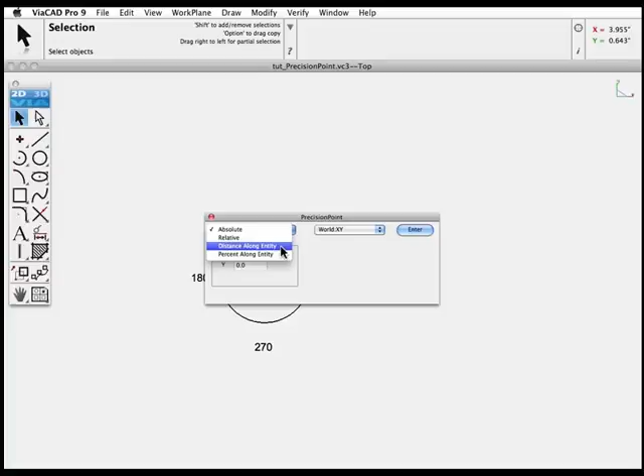The first drop-down provides methods for entering your coordinates: absolute, relative, absolute being always in relationship to the drawing origin, 0, 0. Relative coordinates are relative to your last point picked. Coordinate systems supported: the world coordinate system, working on a 2D work plane, polar coordinates, and relative polar.

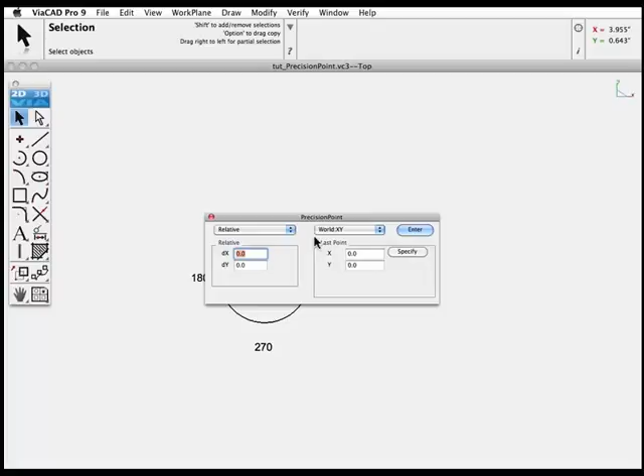To experiment, we'll go up to our line tools, choose the multi-line tool, and we'll pick our first point, access the coordinate input dialog. Remember, there's two different drop-downs. The first is the method for input, so absolute or relative coordinate input, and then you have an option to choose which coordinate system you'd like to work with. We'll start with absolute.

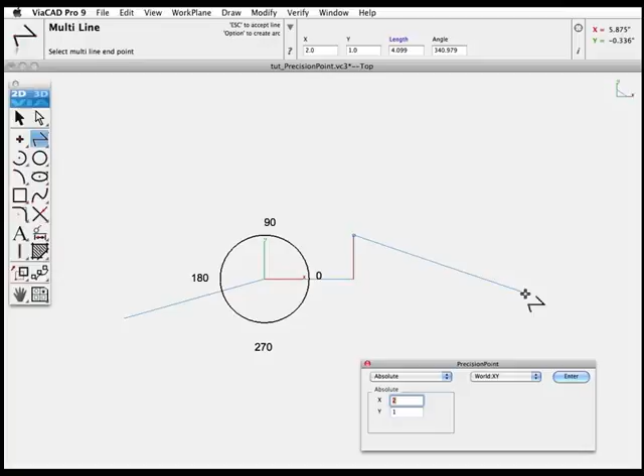Starting at the origin of the drawing, for X, we'll plug in 2, so it draws 2 inches over from the origin. If I want to go up from that point, remember this is all absolute coordinates, so it will still be X equals 2, and in this case Y equals 1. To move over to the right, this is a change in X, so Y remains 1. It's still 1 up from the origin, and 3 for X. So as you work your way around with absolute coordinates, these are the coordinates defined in relationship with the actual drawing origin, 0, 0.

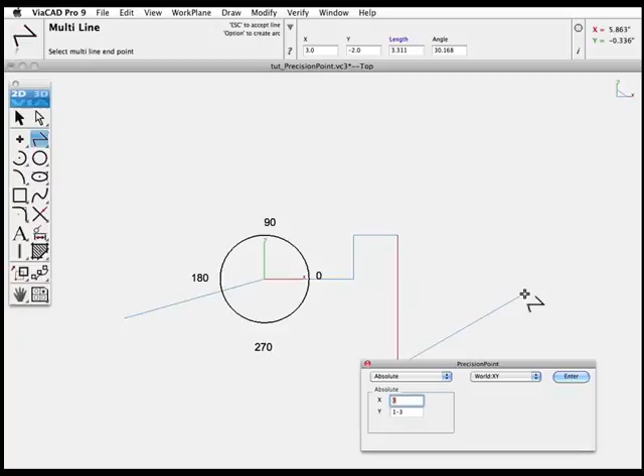Also notice you can plug in formulas. In this case, we've just put in 1 minus 3. We were 1 up, and we wanted to go down to minus 2. And at any point, you can also move your cursor and click to set a point.

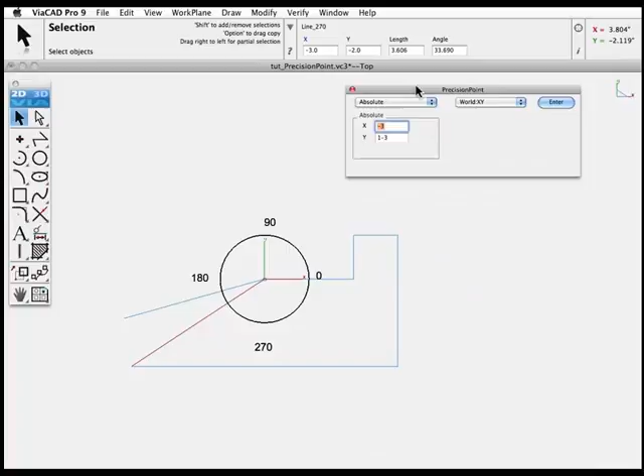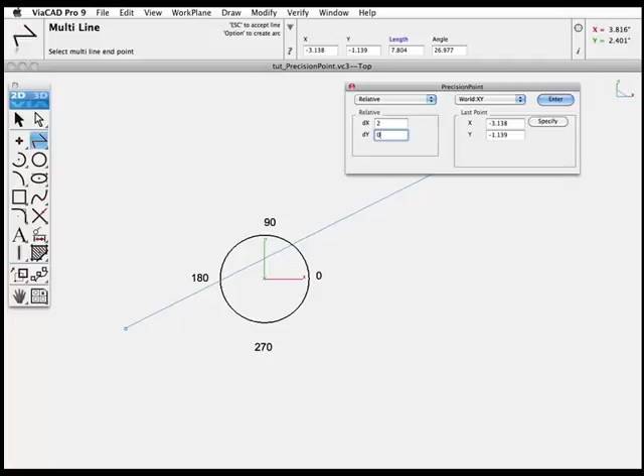Next, let's explore relative coordinate input. We'll choose relative. Notice the last point is indicated. So relative coordinate input is the change in the XY coordinate value. You can also tab through to change the dx, dy, dz values. So in this case, you're entering your first point, and then the next coordinate will be the change in the x and or y coordinate.

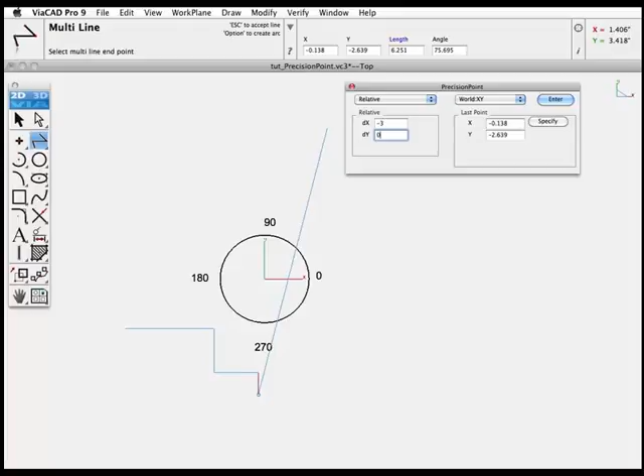So 2 inches to the right, regardless of where you are on the drawing page in relationship with 0, 0, 2 inches to the right will just be positive 2 for x and 0 for y. This is a great tool for doing floor plans, or if you are duplicating, for instance, a drawing that's dimensioned. Remember, the relative coordinates are relative to your last point. So simply enter in where you want to draw to from where you're at right now. It's as easy as that.

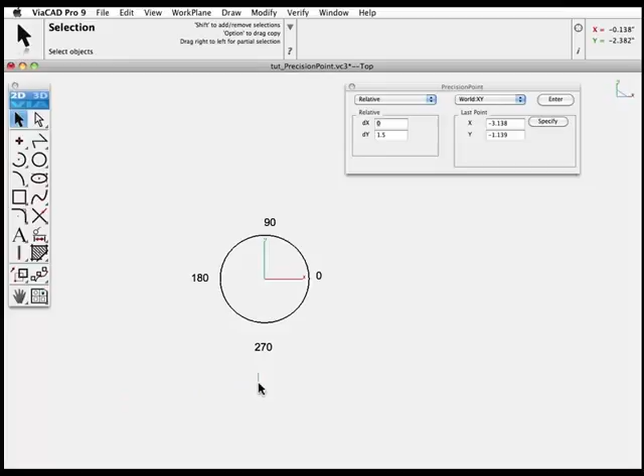This is a great tool for drawing floor plans, by the way. Again, for any other drafting task where you're trying to duplicate measurements that you may already have. Even if you've gone out and taken field measurements and written them down with sketches and notes on a napkin, and you need to be able to translate that into a scale drawing. Great tool for that also.

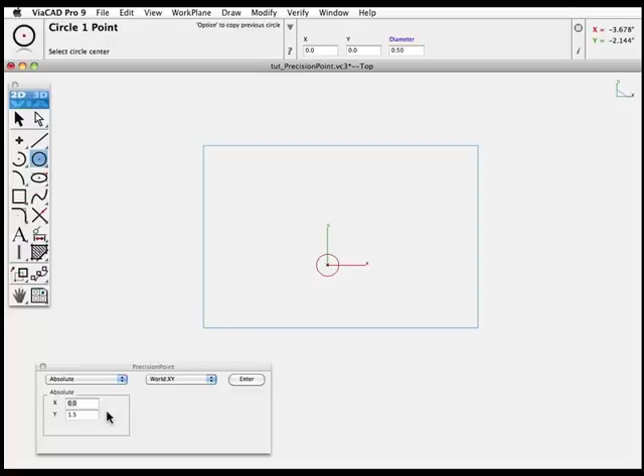This precision coordinate entry makes it easy to place circles, holes. In this case, we'll use absolute coordinates, and we'll place a couple of circles, first at the origin. And remember, in absolute mode, the center of this circle, in this case, will be placed at whatever absolute coordinates that we enter. This is great for milling and other kinds of sheet metal and mechanical applications. We'll delete that, and now let's talk about relative again.

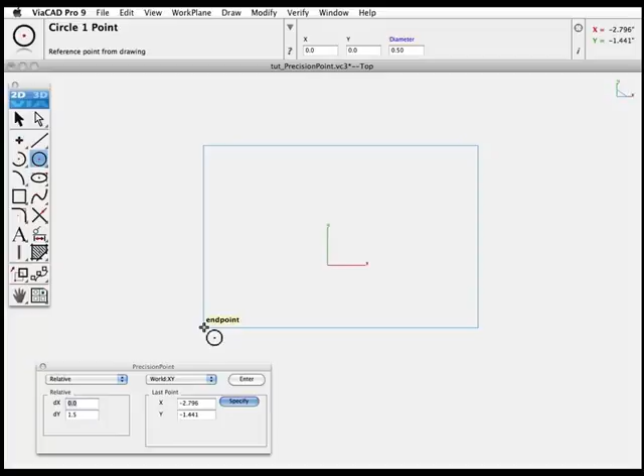Switch to relative mode. Specify. We'll set our from point or last point at the corner. Now we're going to place holes from or in relationship with that corner we just specified. So 1 inch over, another inch over. Now we're going to go 2 up. 1, 0, so just 1 inch over and again. And now 2 inches straight down. Very easy to position things based on the thing previously set.

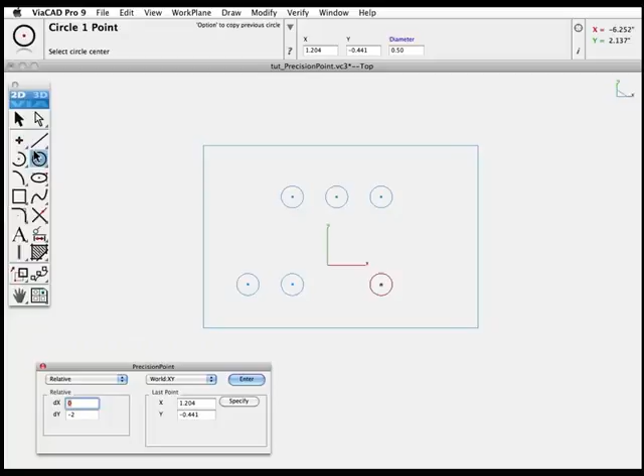Now we'll delete those. Talk about a couple of other options. Select our circle tool again. Now we'll go to the distance along entity option. We'll set this for 2 inches. And as I move my cursor over the segment, you'll see a snap point is created 2 inches from the closest corner.

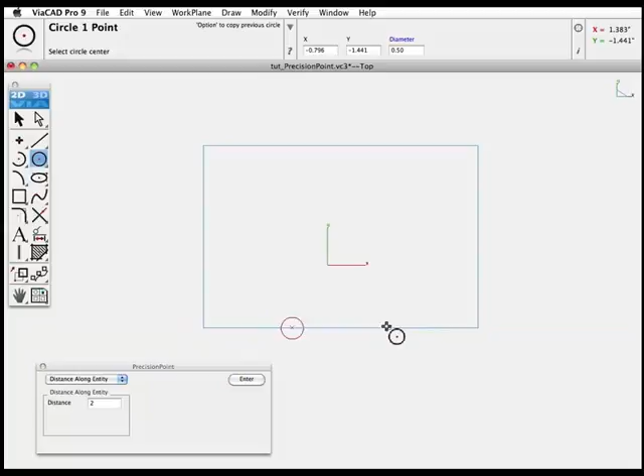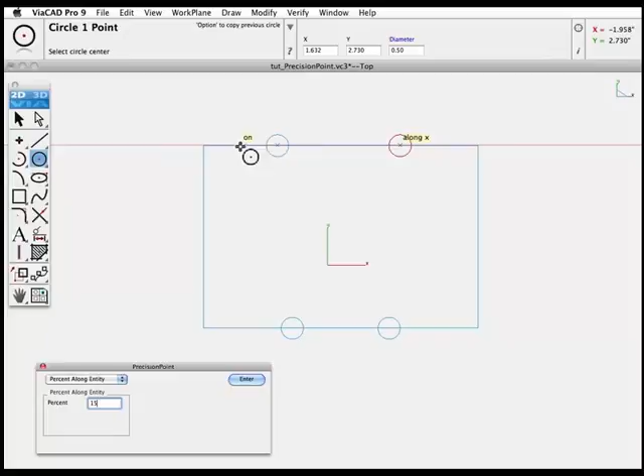There's also an option, percent along entity. Set this for 30. And you'll see that a snap point is created 30% of the total length out from the closest endpoint. Same thing for 15%. So it's the percentage out from the closest endpoint, but the percentage of the length of the entire segment your cursor is over.

Of course, these tools are not just for drawing, they're for editing as well. So we've selected our group of geometry here. We'll choose the Translate tool, pick our from point, and using the relative input mode, we'll specify the corner, and we'll move that geometry to a point that's 1.125 inches from that corner. So this allows us to precisely move geometry around in the drawing as well.

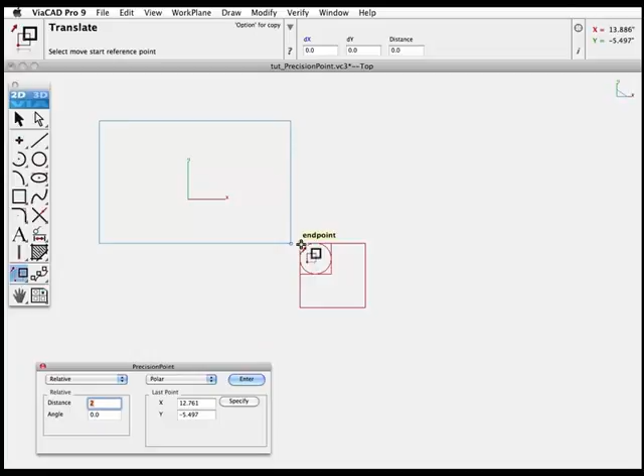So we can draw it, and we can move or copy the geometry around also. Here we'll use relative polar. We'll take this group of geometry again, move it from here, and from this point we've specified, we'll go 2 inches at a 30-degree angle, and it moves that corner right up to where we've specified.

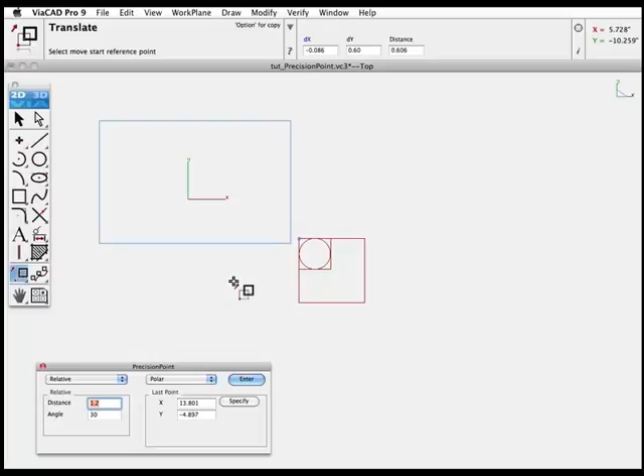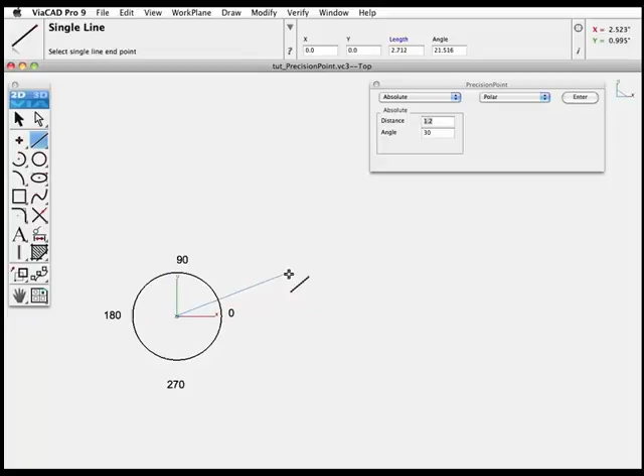Support has also been added to use standard polar coordinates for both drawing and editing using normal polar orientation as shown on the screen. We'll start at the origin. Shows 30-degree angles relative to the actual drawing origin. So we'll set another point at 0, 0 and enter in a new distance of 1.5 and a new angle. We'll enter 210 degrees. Again, these are all based on the actual drawing origin 0, 0.

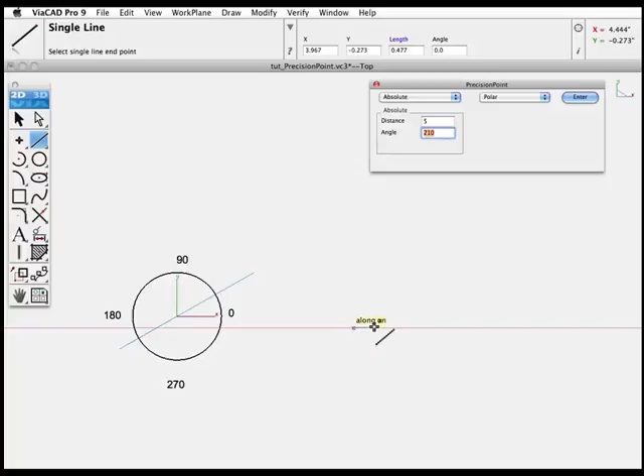Now we can move our start point off of 0, 0, start our line, and then draw a line that's, say, 5 inches long and at a 30-degree angle. Remember, the angle is an absolute angle. It's the angle of the drawing origin to the point in absolute polar mode. So it's 30 degrees from the origin to that point we just drew to.

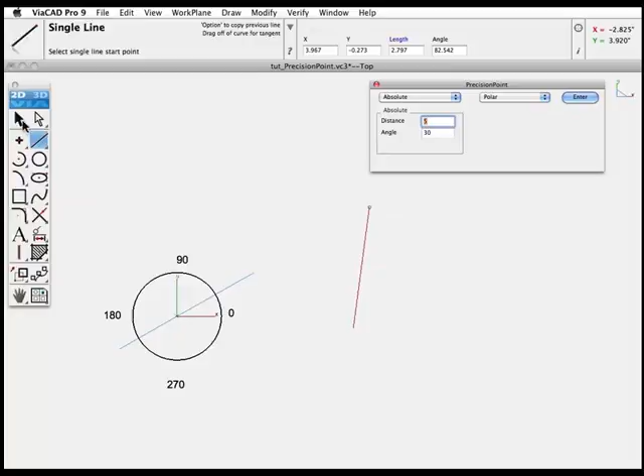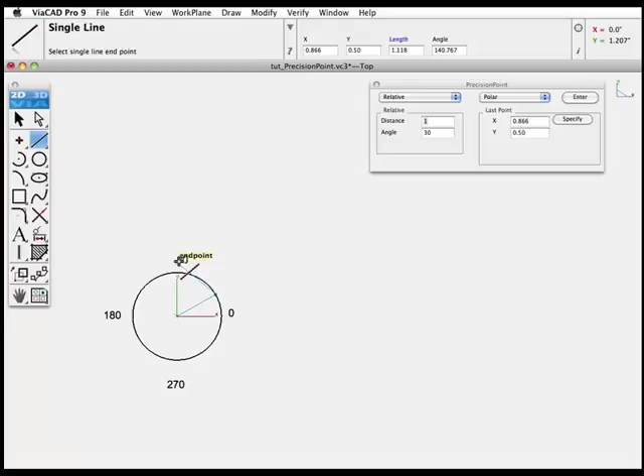Now let's delete these. In other cases, you know the length of the line, you know the angle of that individual line, but you don't necessarily care what angle that point is from the origin. So we'll set our first line, 1 inch at a 30-degree angle. Now we'll set another line. Just assume that that polar diagram is oriented around the point that we're at right now. When I say 1 inch at 90 degrees, it's straight up from the first point.

So in this case, it's distance angle, and it's always the normal polar angle, but it's around the point that we're actually drawing from. An easy way to draw with distance and angle.

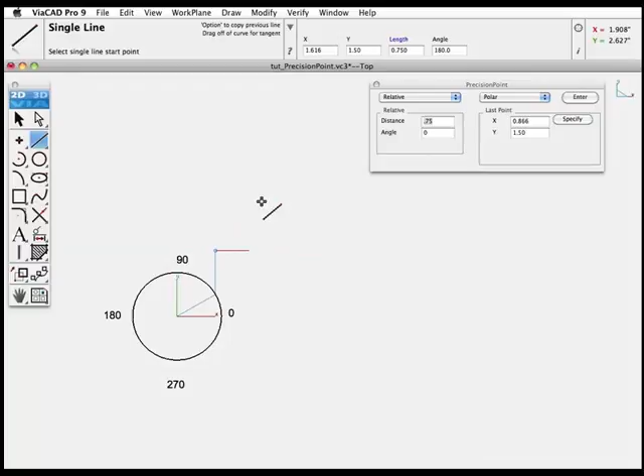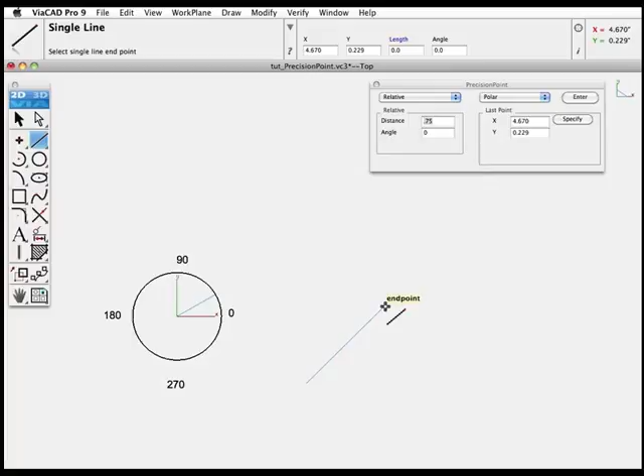Now, there are those cases as well where you'll want to draw lines at odd angles and then draw lines relative to the angle of the previous line. So for instance, you have this line, and I want to draw a line relative to it. So we'll choose specify point 1 and point 2 and pick the two ends of those lines. And now we'll say the distance of the line we want to draw is 1 inch, and the angle is 90 degrees, and the 90 degrees is relative to the angle defined by point 1 to point 2.

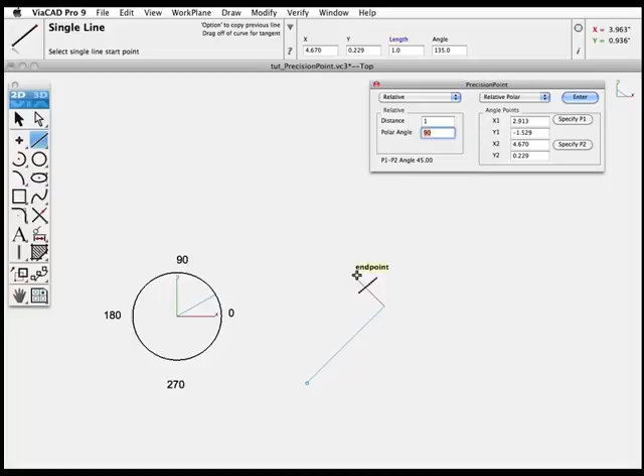And now we've done that, so we'll start another line at that endpoint, point 1 here, point 2 here, and now we're going to draw the next line at a 90-degree angle relative to those 2 points. Very powerful tool, making it easy to replicate dimension drawings.